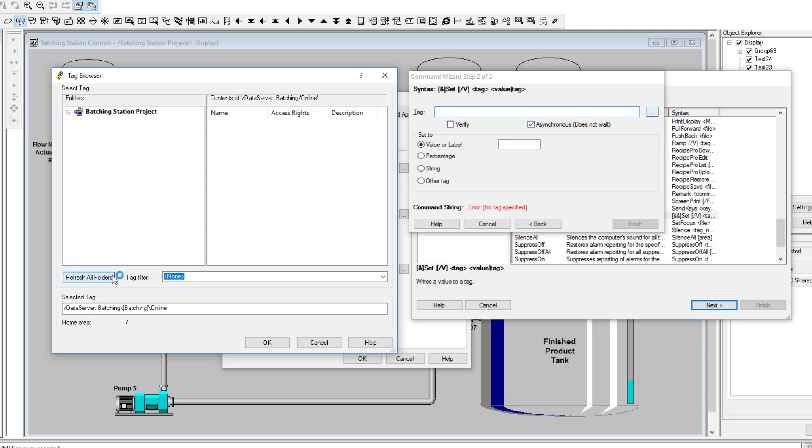We want to populate our tags, refresh them since we just made the tag, then go online and get the actual mixer tag. This is going to be the mixer HMI start button, and we want to turn that on, so we'll verify that.

So the value, we want to turn it on, we'll say 1. Then on the very bottom, when we release it, we want to cut it off, so we'll do the same thing, set the tag on and set the tag off.

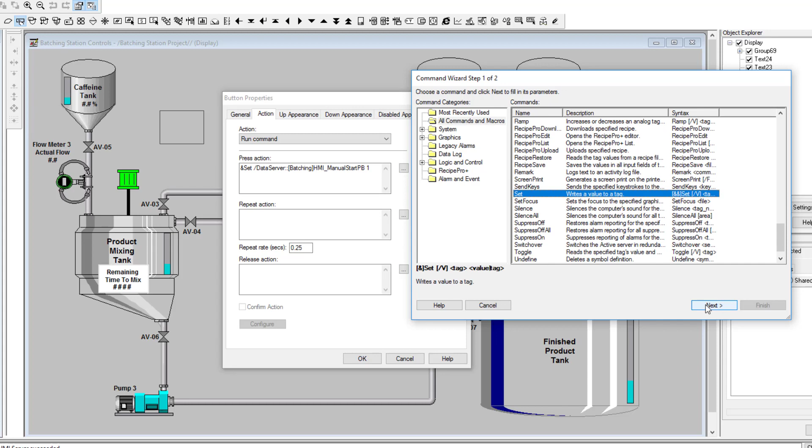The reason for that is if you leave it set on, it will stay on, and we don't have any controls in our actual PLC telling it to cut off. So we just want to turn it off on the HMI, so we'll have it turned off and tell it 0.

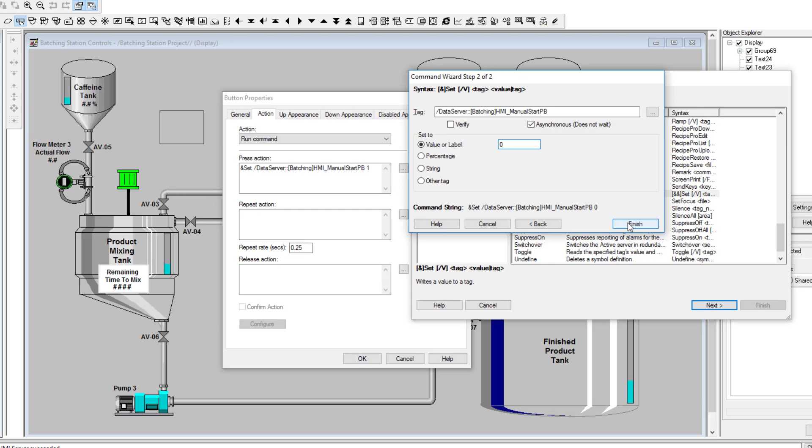In the midst of what we're doing, we're not going to have any repeats or anything like that. We're just going to say if it's pressed, it's a 1, and if it's not pressed, it's a 0. So that's put in there.

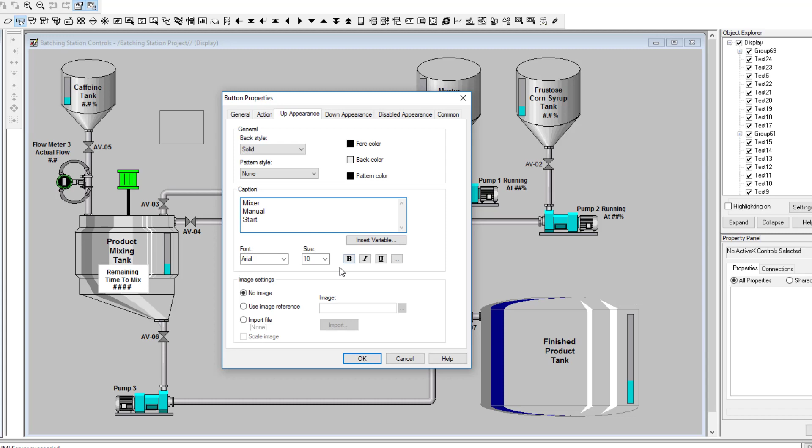So what we'll do is call this the caption, and we'll call this mixer manual start. Let's actually call it just manual start, and we'll make that bold, just really simple like that.

And we can do an appearance, so this would be the appearance up, and this would be the appearance down, and the appearance down would be the same as up. We can change the appearance if we want, and if we want, when it's depressed, we can change the color of it.

In this instance, we can come over here and change the color to indicate that it is pressed, and then we'll copy this over here and paste it, and we'll say mixer manual start pressed. So that will give that indication once it's started.

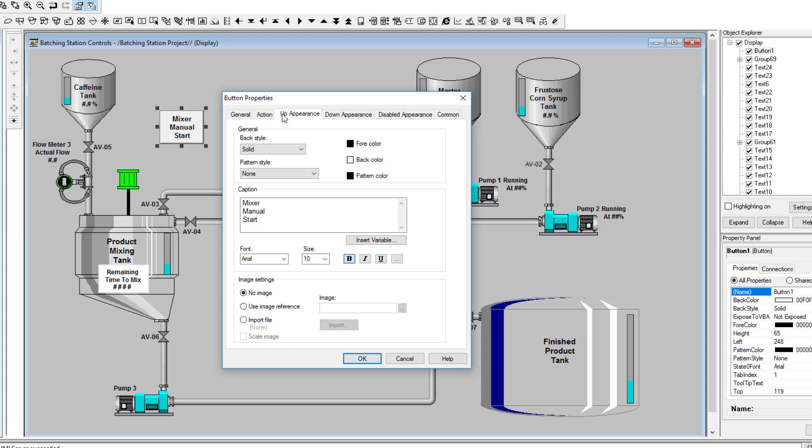Now we can easily come in here, save that, and just test it. We can send that command to see if it actually sent the command over and see if it started. So it did start the actual drive, so we know that is working.

So we had to hold it. Now this is just giving an indication. So now we need to stop the drive because the drive is actually running now. If you look in the drive controls, the drive is actually running, and it's running at 10%.

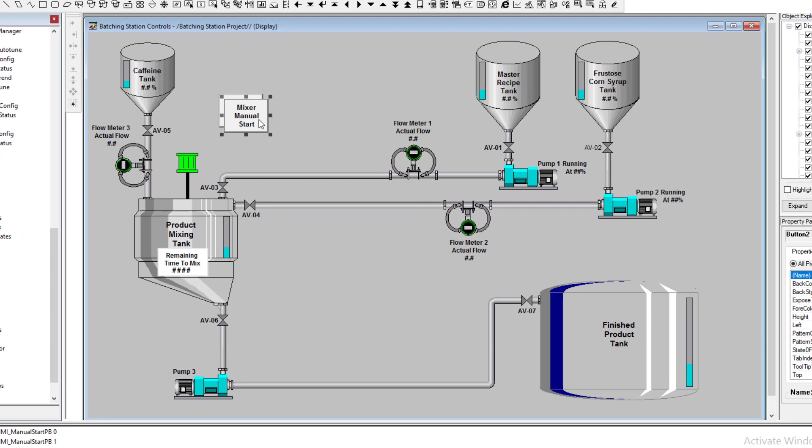So what we need to do is come over here and add some controls. We'll do the same exact thing, copy this, copy paste, and what we're going to do is come over here and change the action.

We know this is a stop button, so we'll just say stop. The only reason we could call the tag is because we can actually find the tag if we want to, but we know that it is there. We know it's the actual stop button, so we'll change this to stop, and we'll change this to stop pressed.

So then we'll call this, and we'll change the color to this, the fore color. Now the fore color is something we probably should have left as a black color, and the back color is what we should change. So the back color would be red, and that would be good. Change that just like that.

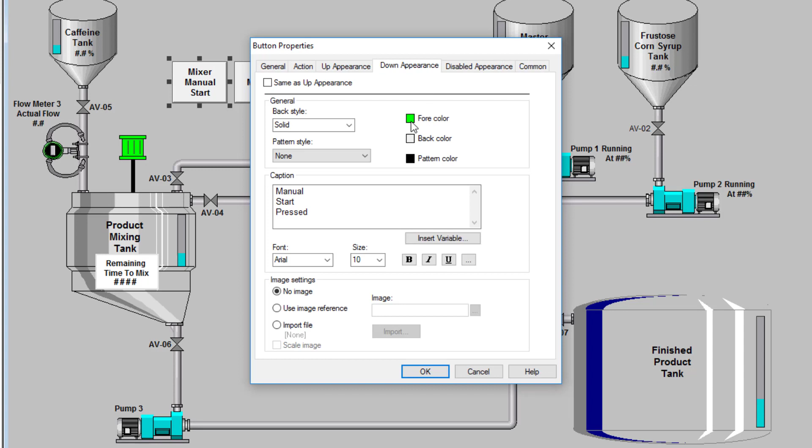Same thing over here. When you change the color over here, we'll change the color back to the fore color of black, and we'll change this to a color green. So now when it's pressed, let's see, save that. When it's pressed... okay, so now we'll stop it.

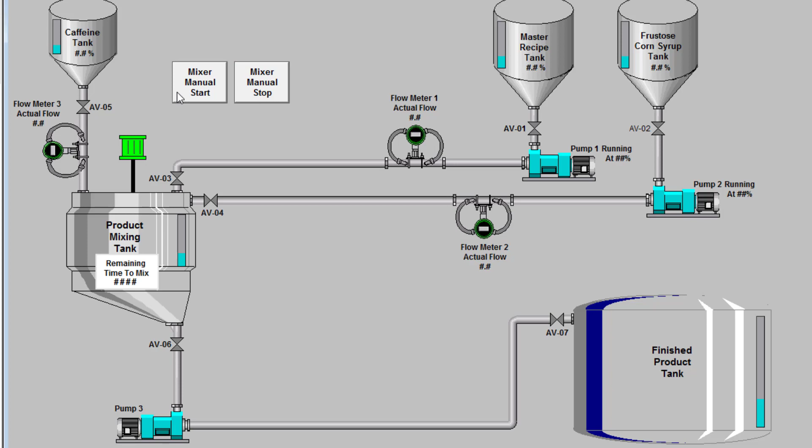So let's change the color again, because I don't believe we got that right. This is the pattern color. We messed up, we put the pattern color. We need to do the back color as green, and we need to make this bold. So let's do that one more time.

Start button, pressed, stop button. Real simple. So now we have our HMI controls in here.

Now we need to make a pop-up screen. I wanted to do these first two buttons first to show you how easy it is to make a screen, or how easy it is to make the controls. Now we need to make a display, and we're going to size the display just like we did before, and we're going to come over here.

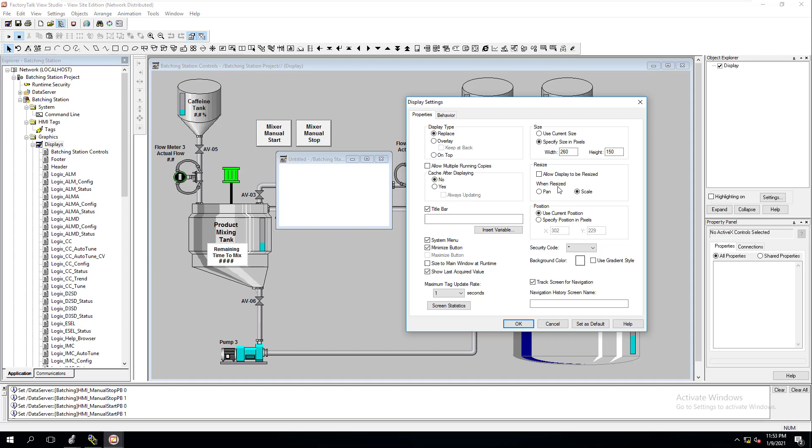What we're going to do to call this display is actually go into the settings. We'll set the current size to the current size of the actual display right here, from point A to point B, up and down. Now the key here is you can change the position where it will actually start, to the current position. For instance, if I move this up or down and go back to settings, you can see the position changed on the Y position. So Y is up and down, and X is left and right.

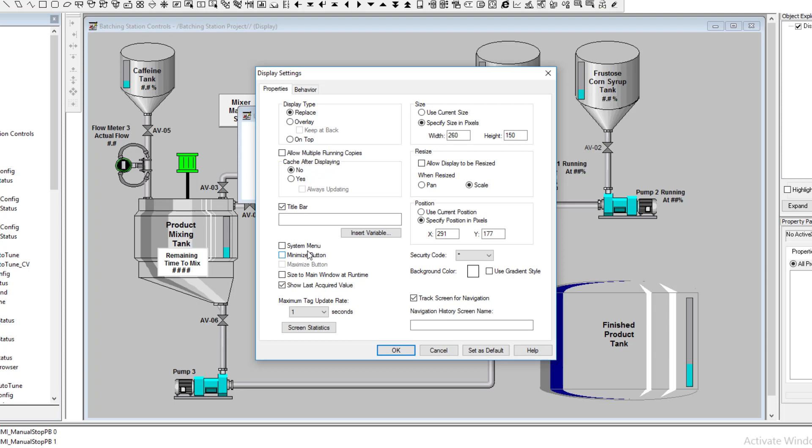So what I want to do is come over here and have this pop up just right here, and then change this to actual location. We'll leave it like that, that's perfectly fine like it is. So we'll leave that just like it is, and we'll say menu off, minimize button. We'll turn the title off, and we're going to call this on top of the other screen.

Now what we want to do is come in and change this to, let's go ahead and get a drawing. We're going to do a panel. We'll simply do a panel in here and have this panel just like this, and we'll have this panel a little bit darker, and we'll change the border color to a dark color, and then we'll raise this to a raised inset. See how that looks.

A little bit too much. Actually, let's change the border to 3, and it's a little bit too... so let's change that just like that. See how that looks? That looks okay.

We need to change the size just a little bit. So let's change the size, the width, maybe that. That looks good. Okay, so now we need to take the two buttons in here. We need to control.

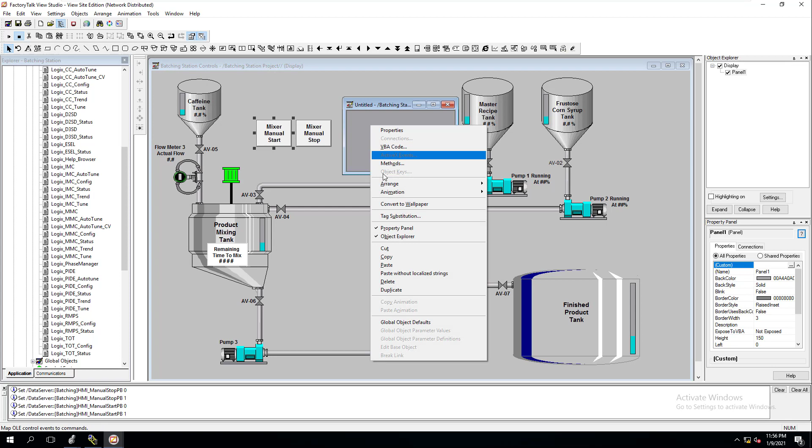Let's undo that. Control, copy, and then open up the screen we had. We'll go into window, the untitled one we had, and paste these in here. This is going to paste that one in, then we'll copy and come back up to our window and paste this in here as well. So paste these two in here.

Now this is the mixer controls on and off. First we want to get these to the right level, so we'll have these spread out just like this. Then we want to come over here, control, and get these to the right level using our tool over here.

Now we can delete these from here because we no longer need them. Come back to our window and we need to make a close, so we're going to do a button. Let's come over here and have this button just like this.

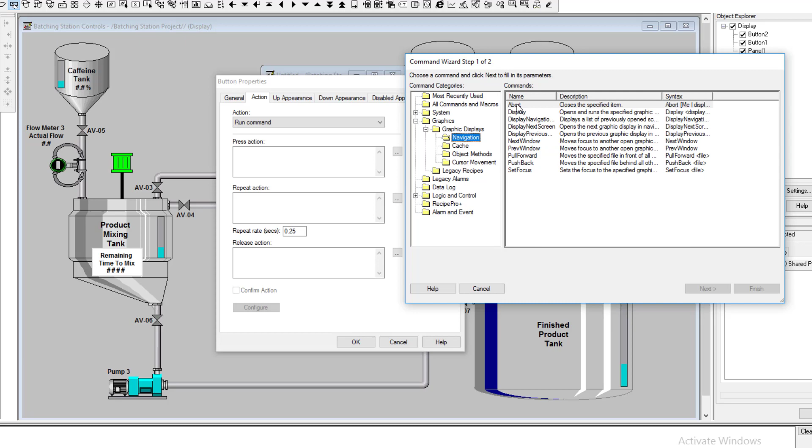What we're going to do is call an action, and in the action we're going to come over here to graphic, display, navigation, and abort. We'll close the active screen, so as soon as it's pressed, it will close the active screen.

Now we're going to open that back up and give a caption, and we'll call that the letter X, and make it bold just like that. So that would give a good indication that's the close button.

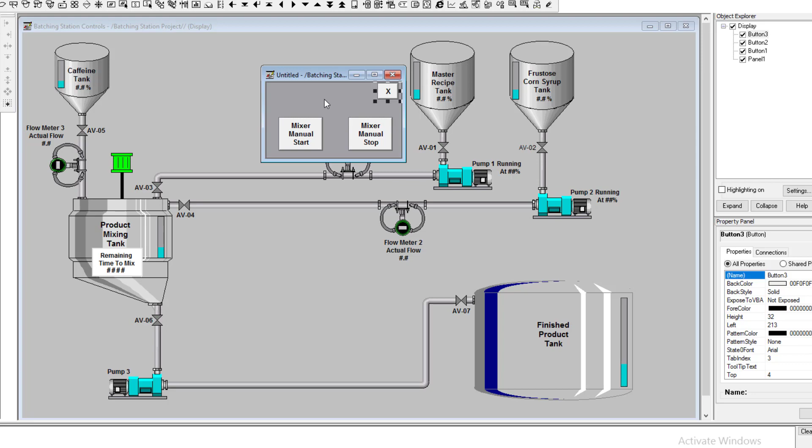Now we need to have a primary kind of indicator of what this is, so we're going to call this mixer manual controls, and we'll have this bold, with the forecolor black. Let's raise this up to a 12, and then change the forecolor.

Actually, let's keep the forecolor at black. What we're going to do is have a little panel, and we'll have this panel the width of our buttons. We'll get it about the same color as our actual buttons, and let's get the border correct, and change this to a raised inset.

Let's come over here and get it a little bit closer. Looks fine, pretty close. Then we'll change this and move it down to here, just like this, and move this to front. Now we can make this a little bit deeper and have the controls look - let's actually change that a little bit. I like the way it looked better.

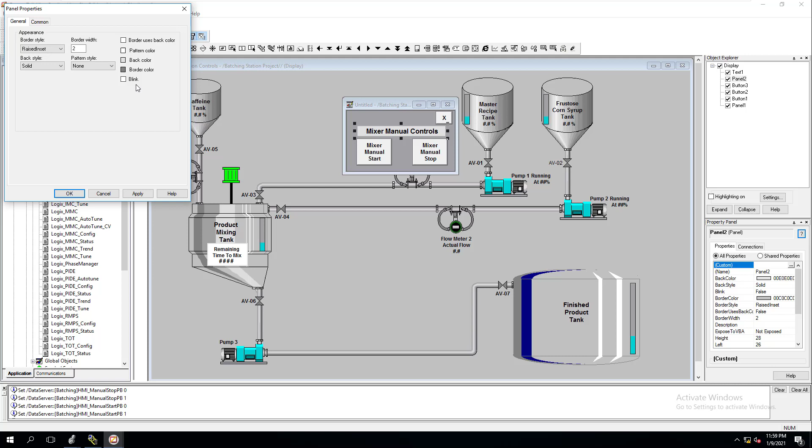Where it's more of a deeper color, I think it's probably because this is not light enough. This one needs to be a little shade lighter. It matches a little bit more, but it's still a little off. I think that matches a little bit more.

So this is just making a rough little screen here, just to show you how we can actually do it and how everything would kind of work. Again, when it comes down to it, you can change where the buttons are too. You can come over here and group this - we'll hold control, group this together, and group it together, move this over here, change this, put this on the bottom.

If we like it better up top, that way it kind of looks better up top. Then what we'll do is save this and call the screen mixer manual controls, and then we'll save it.

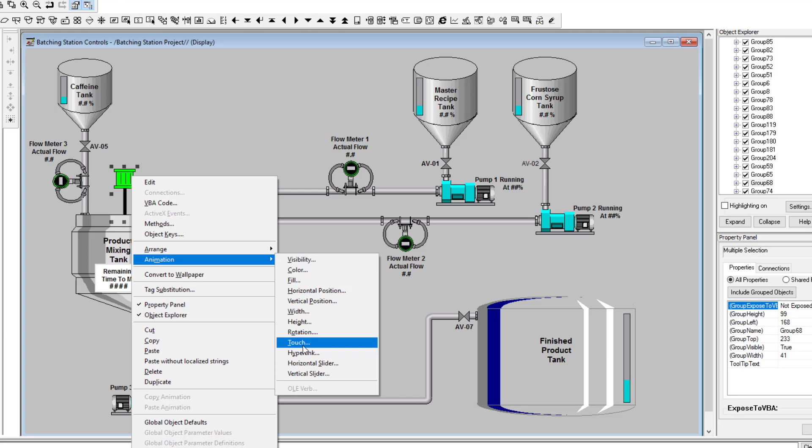Now we still need to come over here and add this to a pop-up, so we're going to call this as a touch on our mixer. When they touch the mixer, they come over here to press, and they come over here to display, navigate, and call the mixer controls, then hit apply.

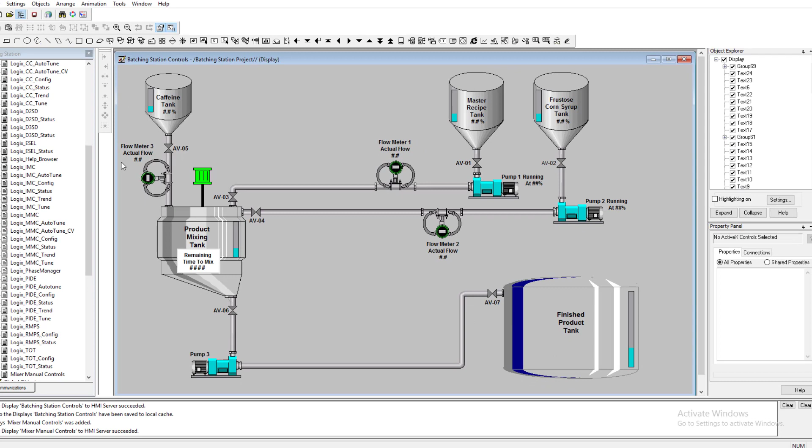So what we'll do here is save this, and then we're going to go ahead and start our client. We want to start our client because we're not able to run the screen as a test mode in development mode and actually call that actual screen we just made. We have to run a client and physically run it like we would normally in a normal operation. So we're going to go ahead and run our client, and just to make sure everything works, we'll pull the manual controls up and run the screen.

And let's start this. It does work. We'll stop. I can hear the drive cut on right beside me, so I just want to make sure that that works properly. And again, we'll close that button, and we can pull that back up if we wanted to.

But now we're starting our client, and as soon as our client comes up, we're going to actually see this work, just like it would as an operator would push the button. So this is giving another fundamental aspect to giving the operator control to actually manually run the actual mixer motor when they want to. So the HMI is popping up. We can speed this stuff up if we wanted to, but for the sake of what we're doing, it's perfectly controlled.

So now you see when I hover over this, this is an actual button that's going to pop a screen up, and you see that's manual controls. That's going to start that button up. This would stop the actual screen. Now we can move this over.

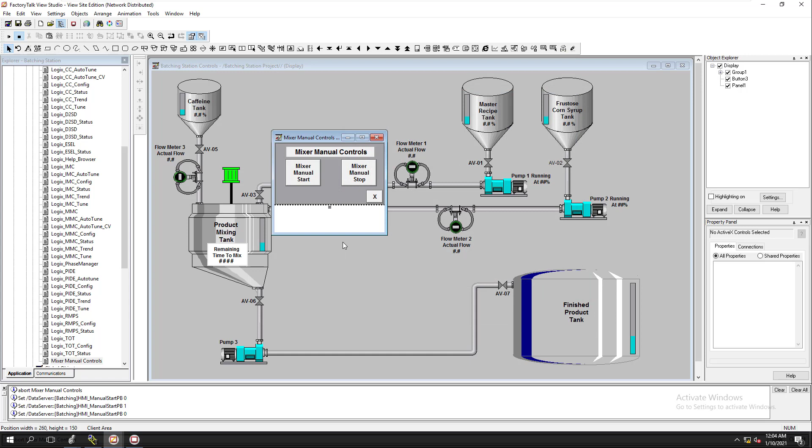This is the side position, and this is the up and down. Let's actually change that to maybe 100, see if that works. And that gave a good indication. Now let's give it a lot bolder.

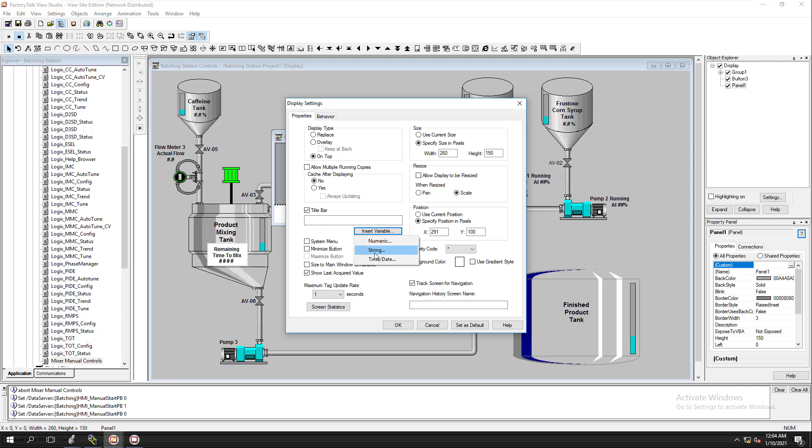Another thing too, if you want to have this screen pop up, you can have the title bar. Or you can enable the title bar, and you can have a variable. You can insert a variable if you want to, but we'll just put that as that. So I'll show you this real quick.

And you see it popped up in a different location this time, and it also popped up the blue box so we can move it around as well. That's the cool thing about doing that. So now we can stop it, start it, stop it, and that's just building a simple little pop-up for this.

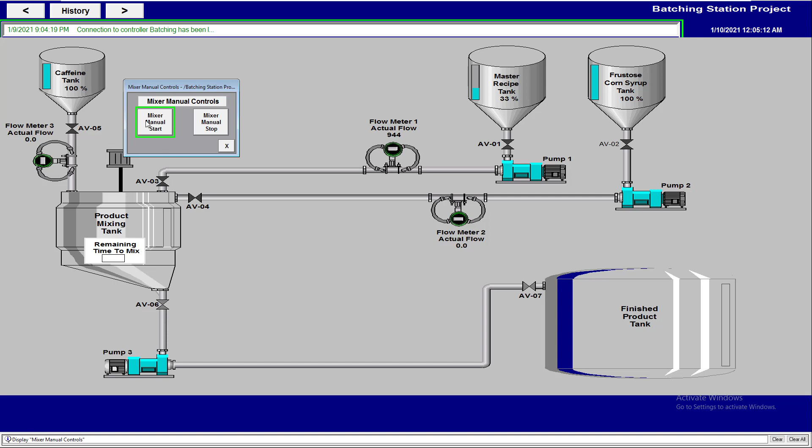Now we could make that look a lot better. I'm just giving you a rough indication of how to get that to work, and we can do that for each one of these things if we wanted to, and have the pump manually run, have this pump manually run, have the valves manually cut on, and use this same control if we wanted to, or even build multiple ones and have them call different ones each time. So that's just giving you an option.

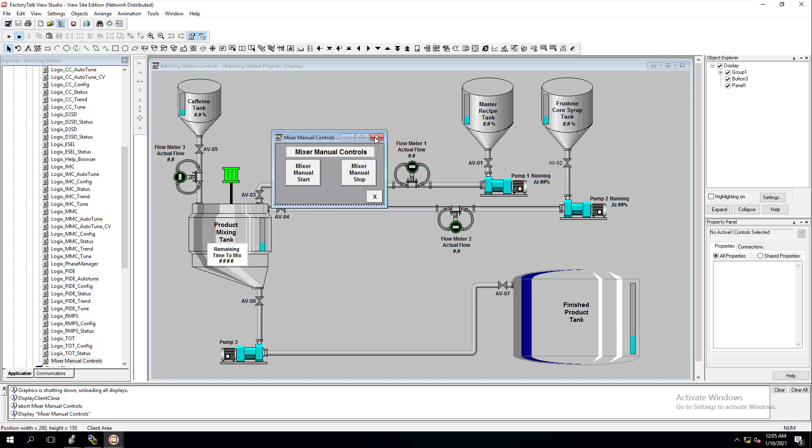So we can Control Shift Q using our client keys, and that shuts down the HMI. So now that we have all that built, you can easily see that our controls are working properly and everything is working just as we built it in the very last video.

So again, hopefully you got a lot out of that. I'm sorry that the video kind of ran a little bit long, but when it comes down to it, the details of how things are done and how you should go about testing things before you waste a lot of time just building and building and building matter. You should test things and then come back and make it aesthetically look better and function the way you want it to work. We may come back and make that little pop-up look a little bit better, but again, when it comes down to it, we just wanted to get the functionality working and get it to that point. So with all that said, we'll see you guys on the next one.